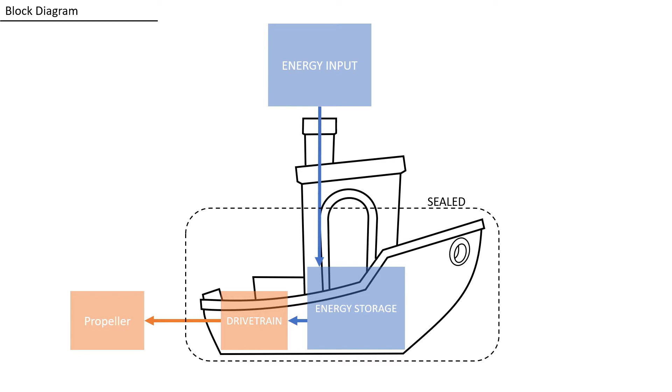So there's a few design challenges we'll have to tackle when it comes to the Benchy. First and foremost is seaworthiness. So the Benchy looks like a boat, right? However, as an actual boat, it's not very good. I think if you remember back to the last episode when I tried to dump the large Benchy I had in the water, one, it was barely buoyant, and two, it pitched forward rather steeply because of how nose heavy it was. So we're going to have to make a few changes to the design of the Benchy in order to make it a good seaworthy boat.

So let's look at one of the first things we'll have to work on, and that's the position of the Benchy's center of gravity. Again, its center of gravity is essentially the average of all of the mass on the boat. This is probably a little exaggerated, but based on what we saw in the last episode, we know that the center of gravity on the Benchy is, first and foremost, a bit forward, which causes it to pitch forward at the nose. It's also high, which makes it unstable. It will not hold itself upright when we try to place it in the water.

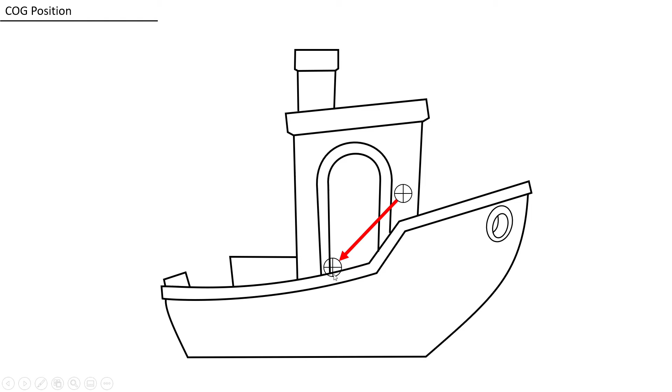So part of the design challenge for this project is going to be to take that center of gravity and try to shift it. We want to shift it back towards the center of the boat so it doesn't pitch forward. It keeps an even line in the water. And we also want to shift it lower so that it is more stable. So again, shifting it backward. We know from when we first tried this out, it was very nose heavy and pitched forward. And if we shift it backward so that the center of gravity is over the middle of the boat, we should keep it at a very even pitch in the water.

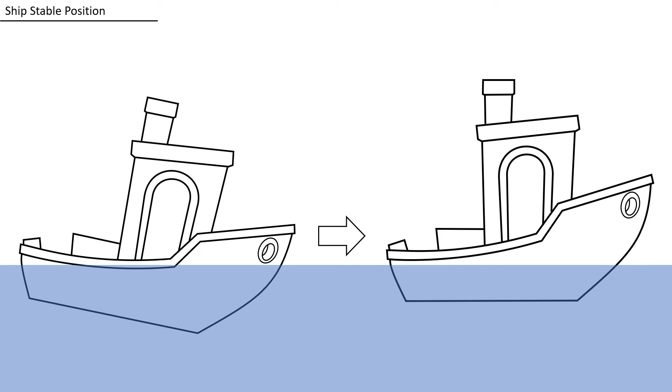That's pretty straightforward. What is a little more difficult, especially for me to grasp as I tried to get through this, and something I hope to talk about and maybe do an okay job explaining, is more of the center of gravity with respect to roll.

And this is something to do with the height of the center of gravity. So we want this ship to be stable in roll. That's back, kind of left and right in the screen here, looking from the front of the boat.

So the first thing I want to cover is, as I went through this design, the first thing I thought of was intuitively where I thought the center of gravity should be to keep a boat stable. And that was actually below what we call the center of buoyancy. And let's take a step back.

The center of buoyancy is essentially all of the portion of the boat that sits underwater, the portion of the hull that is displacing water. We know from Archimedes that the amount of buoyant force created is equal to the amount of water displaced by the boat. So you have a buoyant force created, and that buoyant force is actually located essentially kind of similar to the center of gravity. It's located at the average center of the displaced volume, right?

So that's going to have a left and right position. Obviously we want to keep it on the center line of the boat, and it's going to have a height as well. So one thing we can think of intuitively is to have our center of gravity below our center of buoyancy. And what that would mean is that our center of gravity would essentially hang from the center of buoyancy, almost

like a pendulum. So that if the boat were to roll, the center of gravity would want to then find the lowest point with the least potential energy, and that would always be directly below the center of buoyancy. So that's a very easy and intuitive way to think about stability in terms of our buoyancy location and our center of gravity. The problem this creates is that that is a very unrealistically low center of gravity we would be looking for.

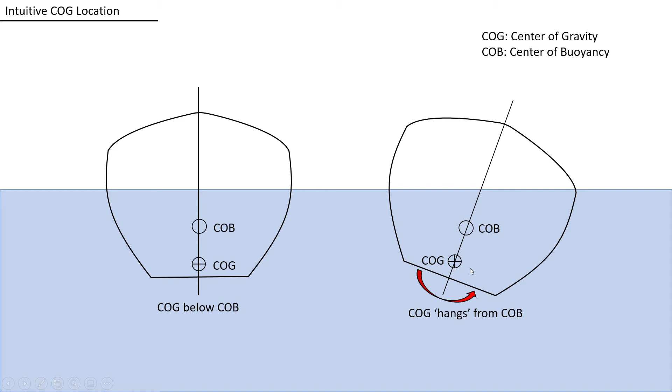Once the boat rolled and lifted that center of gravity up, it's going to want to just swing back down like a pendulum, back down to its lowest position, which is where the lowest potential energy is. However, there is another way to think about stability in terms of center of gravity and center of buoyancy, and that is relative to what we call the metacenter. I'm putting that in quotes.

So, not being a naval architect myself, the concept of a metacenter was a little new to me, so I hope I don't butcher this explanation. I did read into it a little bit to try to understand it. If I've said anything wrong here, please point that out in the comments because I don't want to give you bad information.

But the main definition of the metacenter is that when the boat rolls, two things happen. Our center of gravity stays in one location relative to the boat because that doesn't change. Our center of buoyancy may actually change a little bit. As the boat rolls in one direction or another, more of the hull is forced into the water, and that kind of brings our center of buoyancy either right or left relative to the roll.

And if we take that center of buoyancy and draw a vertical line up to where it intersects the center line of the boat, that's our metacenter. What is important about the metacenter is that if the metacenter in this situation is above the center of gravity, our boat is stable. If it is below the center of gravity, our boat is unstable. Now, on the face, that is just a definition with no explanation. So in the next couple slides, we'll talk about that more.

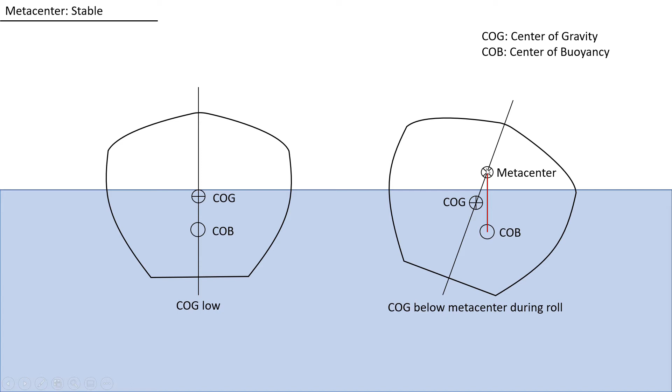And the one way, again, looking at it from the unstable configuration versus the stable configuration, we're looking at a low center of gravity compared to the center of buoyancy. So when the boat rolls, the center of buoyancy shifts out a little bit, it's cast upward, and then our metacenter is still above our center of gravity.

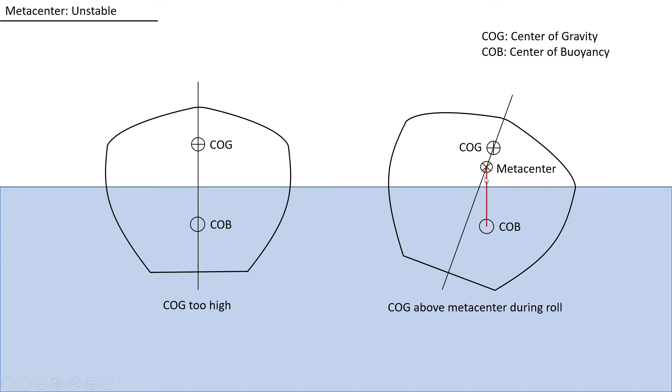If we have a very high center of gravity as the boat rolls, we're looking at a very similar situation for the center of buoyancy. But when we cast that line upward, we find our center of gravity above our metacenter.

So one way to kind of explain why it is important for our metacenter to be above our center of gravity as opposed to below it is to think about the rolling moment created on the boat by the center of buoyancy. So in both of these pictures, we're looking at, in this case, a case where the metacenter is above the center of gravity.

So when we take the center of buoyancy and cast it upward, we would find the metacenter right about here. But we're not even thinking about the metacenter right now. We're just looking at this from rolling moments. In the unstable situation, we cast that line up and we find our metacenter below the center of gravity.

But more importantly, in the stable situation, the force generated by the center of buoyancy, when we cast it upward, creates a rolling moment that is to the right of the center of gravity. So in this situation on the left, our boat is rolling right.

However, because our force created by the center of buoyancy is to the right of the center of gravity, it's creating a counter rolling moment to the left. So our boat's rolling right, and our counter moment is to the left. In this situation, we would consider the boat stable because, again, that rolling moment wants to work against the roll of the ship.

In the unstable situation, where our center of gravity is above the metacenter, what happens is that as our boat rolls right, the line of action of the buoyancy force is to the left of the center of gravity, which means it actually creates a rightward facing or a clockwise rolling moment.

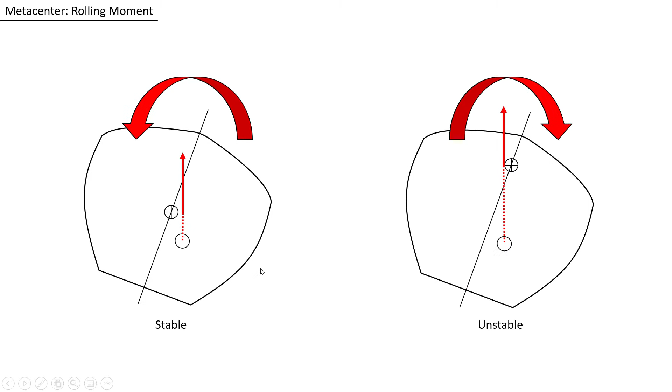So again, going back to the stable configuration, we had a picture previously where the boat was rolling right. Let's look at both cases. So let's first assume the boat rolls right. The rolling moment from the center of buoyancy then rights the boat, but let's say it overcorrects and rolls left.

Well, what's going to happen is that as that boat rolls left into the water, it's going to force more of the left side of the hull into the water, shifting the center of buoyancy over to the left, again outside of the center of gravity, creating a new counter rolling moment that's going to roll against this new roll of the boat.

So think of the boat kind of just like bobbing back and forth. Every time it shifts in one direction, the center of buoyancy shifts outward of the center of gravity, creating a new rolling moment that's going to want to right the ship. So that's what we want in this situation.

Because again, it's going to be very unrealistic to bring the center of gravity low enough so that it's below the center of buoyancy, but we just want to keep it low enough so that it's below the metacenter of the ship. And that should keep our ship stable.

So a few ways we'll go about doing that are we'll tweak the geometry of the ship to try to bring the mass a little bit lower. I think some of the mechanisms we're going to put into this ship are also going to drag the mass a little bit lower. And finally, worst case scenario, we can also look at ballasting the ship a little bit just to bring that weight a bit lower.

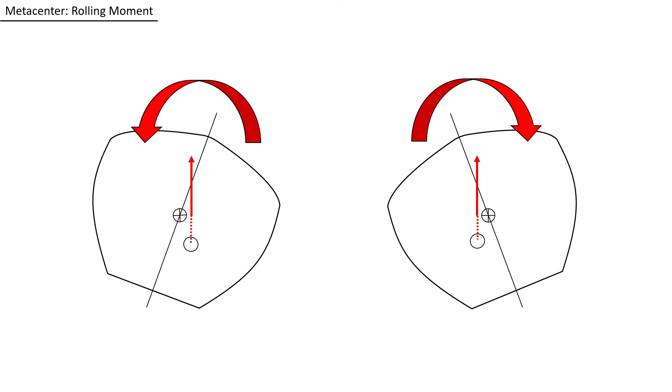And again, so those two types of stability we can get out of this. In the case where the center of gravity is below the center of buoyancy, I would consider that a static stability, where there is a point of lowest potential energy that the boat always wants to keep at. Now, this will be a great thing to have, but it's an unrealistic situation because we need to bring a lot of mass very low in the boat.

On the other case, with the metacenter, we have what I'd call dynamic stability, where the geometry of the ship is constantly creating new rolling moments that act against unstable orientations, keeping the ship centered. So I hope that explanation was clear enough.

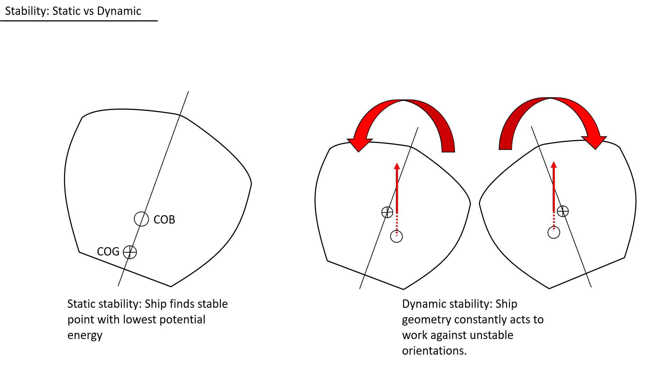The other thing we're going to have to look at is essentially the buoyancy of the ship. The Benchy is not a very buoyant ship. It sits very low in the water. It does not displace a lot of water. It cannot carry a lot of load. So spoiler alert, because I'm actually pretty deep into the CAD for this at this point.

What I found is that I originally recreated the Benchy very close to the original design, put all the mechanisms in there, got a weight for the ship, and then did a little bit of stuff in CAD to get the buoyancy of the ship, and found out that it weighed 3 times more than the amount of buoyancy it generated. So this was a plan I already had considered, where we're going to have to change the profile of the Benchy a little bit in order to make it buoyant enough to hold itself up in the water.

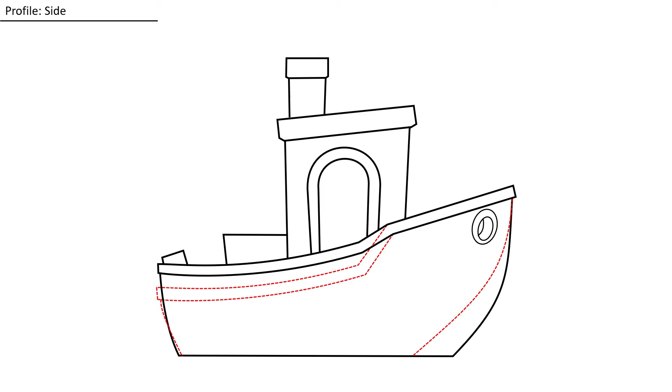You kind of see, again, if you look at these both in side profile, you can tell it's different. Obviously, it's not as stark and sweeping and dynamic as the existing Benchy, but it still has the spirit. It's still mostly there. It's a little more bulbous and a little more actually seaworthy compared to the real life Benchy.

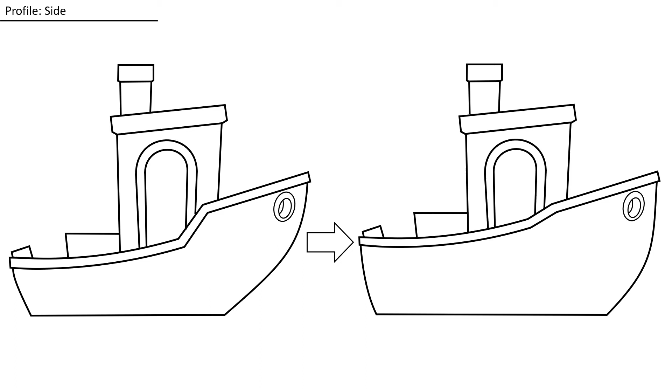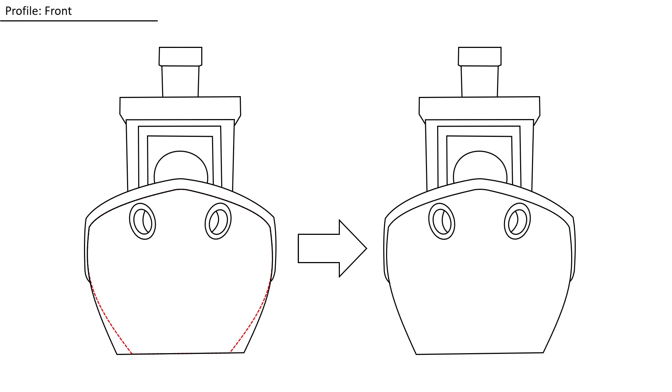The other thing we can look to add here, and again, spoiler alert, it's already been done, is to add a ballast keel to the boat. So again, the Benchy has a flat bottom for printing, obviously. One thing I want to do to take advantage of that is make a separate part that is the keel of the boat that has, I think this is called a sail keel, I don't remember, but a very deep keel that can be used to increase the amount of water that the hull displaces, and also give us a little bit of option to add a little bit of trim ballast.

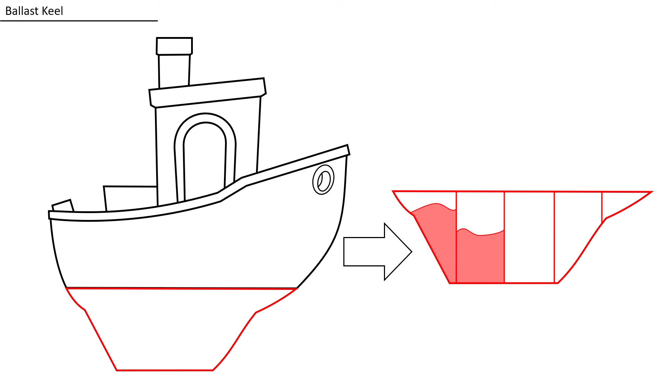We can use that trim ballast to both set the height of the ship in the water, essentially, and also to adjust its pitch if need be. The draft of the boat. There we go. This is the term I was thinking of. So again, we can take the existing position of the Benchy, a little bit nose heavy, and definitely we'll call it a little deep in the water. Use that ballast keel to increase its buoyancy and also to trim it so that its pitch is horizontal, is even.

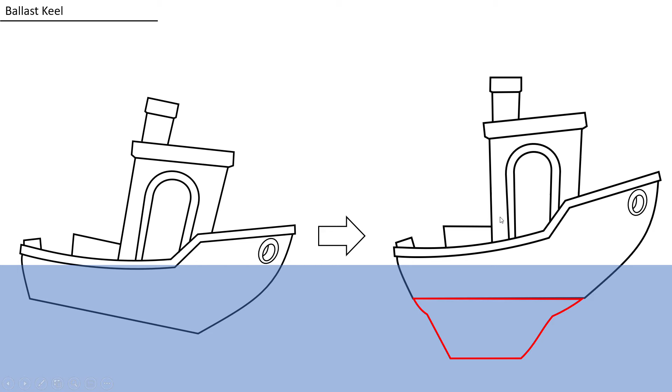Another thing that'd be useful about a ballast keel is to add, I think it's a sail keel. Correct me in the comments. I'm sorry if this is wrong, but we essentially add a large, broad, flat surface to the bottom side of the keel. What that's going to do is that if the boat is rolling, if the bottom of that boat was streamlined, it's going to cut through the water very easily, meaning we're not going to get much resistance against the roll.

However, if we add a large, flat surface on the bottom of it, as the boat rolls, that keel, that large keel that juts out underneath of it, can actually create a good bit of friction force that would resist the roll of the boat. So we get a little bit of extra resistance against roll, and we get extra volume for both buoyancy and trim ballast if necessary. So that's why when you see some pictures of this in the future, we'll see we have a pretty deep ballast keel added to the boat.

Probably butchering some terms here, and I apologize for that.

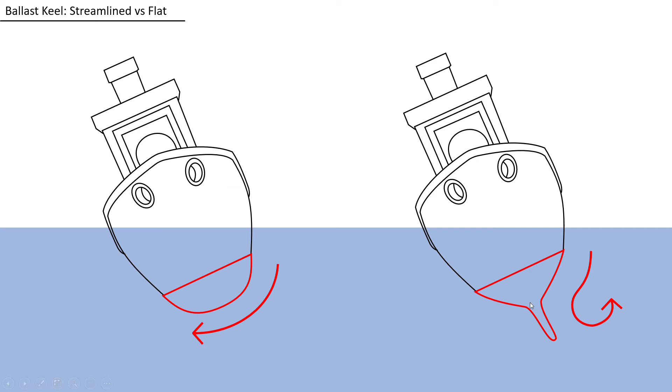So that ends the discussion on seaworthiness. The next thing we'll have to talk about is the construction of the boat. So the part breakup for this that I've determined is that we're essentially going to make the hull and the superstructure two separate parts. The hull will be nominally hollow with just the walls in there. We'll have some adjustments to the walls for sealing purposes, and then we'll have all of the points that the gearing of the wind-up mechanism will go into.

So looking at this from a breakdown, the wind-up mechanism will go inside the hull. The superstructure with the deck of the boat will go over top of that. Those will be screwed together. That'll create one sealed boat with a wind-up mechanism inside of it.

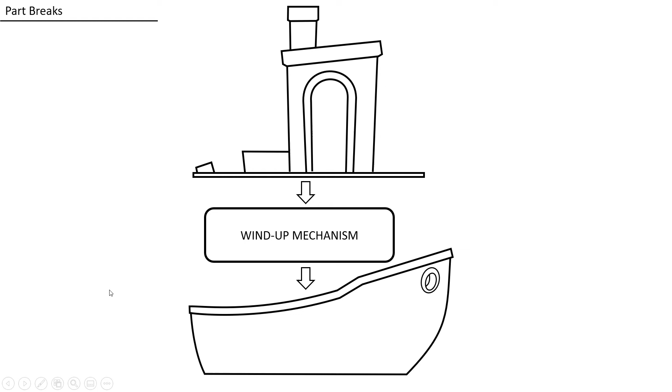The mechanism overview, so a little more detailed here. Starting from the top, we'll have an input handle. I like these, spoiler alert. I like these large round handles. They have a nice old school feel to them. So this is something I like to design in.

From the input handle, we'll have a shaft that runs down, and this is actually really cool. I'm able to use the chimney of the boat as a bearing for this shaft. So this shaft will run down the chimney, which has been extended all the way down to the deck, creating a very long bearing surface for the handle shaft. That's going to go down to what I call a bobbin. That bobbin will be right in line with a flat wind-up spring.

And what's going to happen is, we'll see in the next slide, that spring will actually be spooled off of its existing holder onto the bobbin as we crank the handle. And then when we release the handle, it's going to want to spin the spring off of the bobbin, and that'll turn the gear train out to the propeller.

The gear train as designed is a 3-step gear train. There's a large gear connected directly to the bobbin. That goes to the first stage of the gear train, which is a small gear connected to a larger gear. That does the next stage of the gear train, which is essentially the same, except our larger gear is actually a miter gear, a bevel gear. There's a small difference between the two of them. That actually runs the gear at a right angle to the propeller.

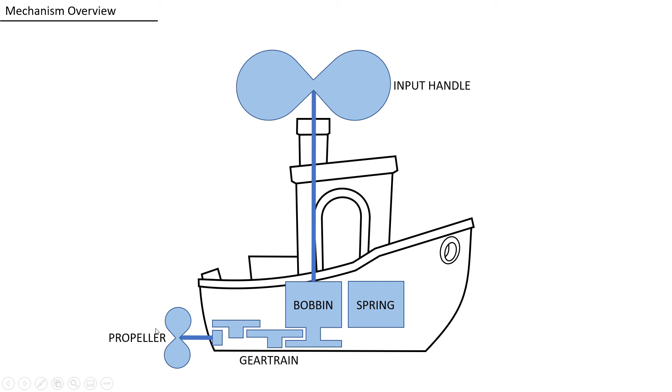These are called constant force springs because, again, they're very tightly wound, and the force they generate is just proportional to essentially the radius of the spring, which doesn't change much as you reel this out. So these are really good because instead of like a normal spring where we have that force that's proportional to the deflection, here we get an almost constant force all the way through our windup.

I'm targeting at least two different variations for this spring, a 1.6 pound and a 2.6 pound spring. I want to be able to drop either in. They're roughly the same size. We can try out and see which one feels the best and gets the best results. So again, we wind up that bobbin, which will spool our constant force spring onto it. That bobbin is connected to the first drive gear.

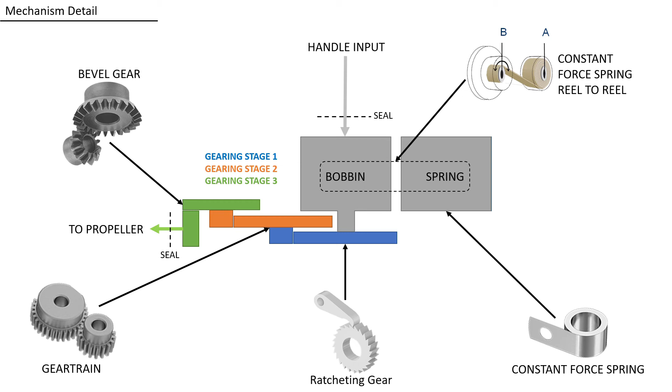The final thing to discuss about the mechanism is speed governing. So if you compress a spring and release it, it's going to want to release all that energy as quickly as physics will allow, right? It's just going to pop back out. And the same thing goes for constant force springs. If you unwind them really long, almost like a roll of tape, and let go of them, they're going to want to spring back as quickly as possible. So we need a way to slow that speed output down.

And there are plenty of ways this is done in other mechanisms. One interesting way to think about this is like the escapement in a clock. As you wind that spring up and release that energy, you need a way to essentially slow that output into a tick-tock motion that can actually run the second hand on a clock. That's done through the escapement mechanism, and it also uses, in some cases, a pendulum in order to govern that motion. I might be a little off base in this explanation here, but I think we're pretty close. One difference there is that it essentially uses the geometry of the escapement to stop the rotation, and then move back and let the rotation move again.

In this case, with our speed governing, what we're going to rely on here is actually just drag to govern the speed of the boat. I'm going to put a link to a favorite engineering channel of mine that actually discusses it very well, a breakdown of a wind-up toy, one of the little wind-up ones that plays music. And in part of that video, I suggest you watch the whole thing, but about midway through, they discuss how that mechanism actually governs its speed.

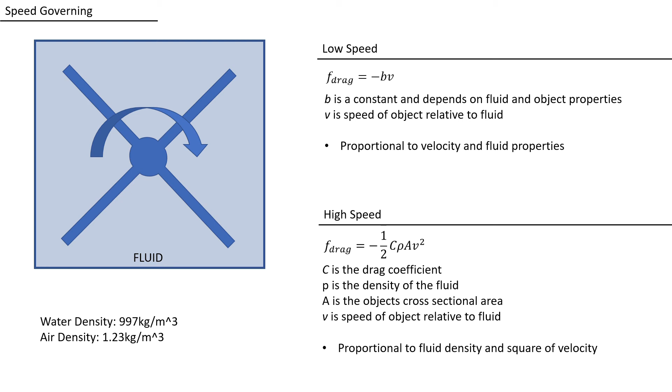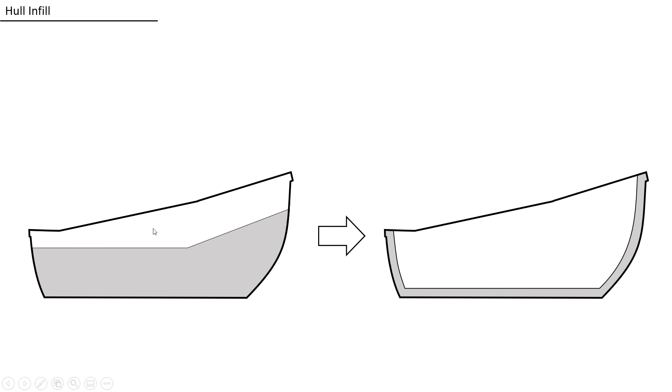Final note about the construction is that the hull in our design is going to be hollow compared to what it is in the Benchy. The Benchy essentially has the deck here. It angles up at the front for some reason. This extra bit of volume really makes it front heavy. In the construction we'll look at next week, this is actually hollow. There's a little bit of mounting points and some features built in for sealing purposes, but overall it's a hollow boat. That helps with weight, because it's the same amount of water displaced, but there's less weight inside of there.

And finally, there's some printing considerations to take into account. We're 3D printing this, and 3D prints tend to not be the most watertight things in the world. So there are a few things after researching that can be tried to improve the watertight capability of the 3D print. We can add extra perimeter passes, which is something I might play with. So as we go around the edge of the print, do we want 2, 3, 4, 5 perimeters before we get to the infill?

We could try 100% infill. Spoiler alert, no we can't, because the boat will be too heavy and it cannot displace enough water to hold itself up with 100% infill. We could try a little bit of slight over extrusion to kind of smush these layers together, and we could play around with the layer height.

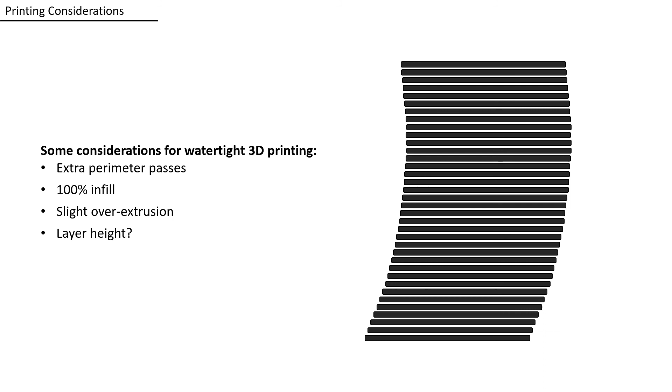Because what I found at the end was that once I was done designing version 1, almost ready to print and put it on the printer, I decided to take a check. I was able to, in the CAD, find out how much volume the hull displaces, essentially up to the line of the deck, right to the top of the propeller, and compare that to the weight of the boat. And as it turns out, and we'll talk about this more next week, it was displacing about 1/3 of a pound of water. So that's how much buoyant force we were going to create.

The boat, however, weighed a pound. So the boat was 3 times heavier than the amount of buoyancy that it could create, which is a problem. It almost, pardon the pun, but it almost sank the project right there. But like we talked about in some previous slides, we can play with the geometry of this boat because, again, the Benchy is a very slim, slender design. It's a caricature of a boat. It's meant to look cool sitting on your desk. It's not really meant to function as a boat.

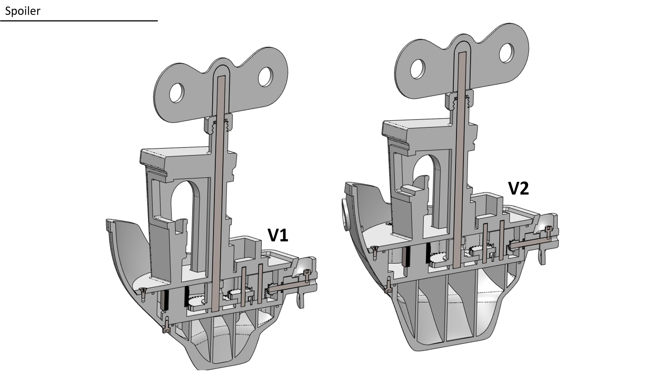But yep, just wanted to talk about that now, because that is definitely a situation where these high level concepts about the stability of the boat, the buoyancy of the boat, they really do come into play. And when you're designing something like this, you got to keep these in mind. I got all the way to the end of my design, kind of assuming that this boat would have generated enough buoyancy to hold itself up, only to find out that I was off by a factor of 3. I needed to do some pretty deep changes in order to get this close to where I think it's going to work. So, take it from Bender here. The laws of science are a harsh mistress.

So, yep, that kind of wraps it up for today. In our next episode, I will dive deeper into the SolidWorks CAD you saw in the previous slide. We'll get into a good amount of detail about the construction of the boat, the weight of the boat, how we plan to put it together, the details on the gear train and stuff like that. All of that is almost 100% decided at this point. I think by the time I am on the microphone talking about it, it might even be printed out, and we can even have a discussion about how it's working.